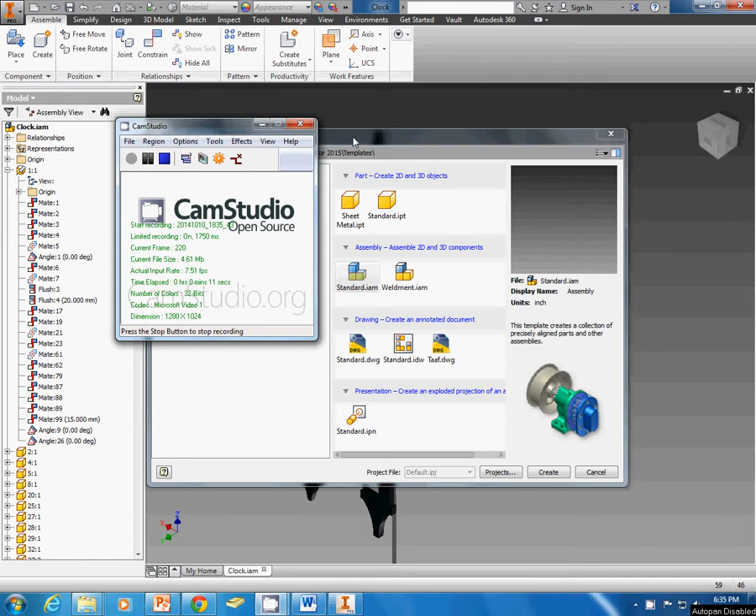I'm going to start out by doing a standard.iam, and I'm going to go ahead and place all my train parts into it. So I need to go ahead and navigate to where my train parts are saved. So right here is the default train parts. Some of these are different than how I demonstrated. This is the train assembled here, but I'm going to go through how to do that.

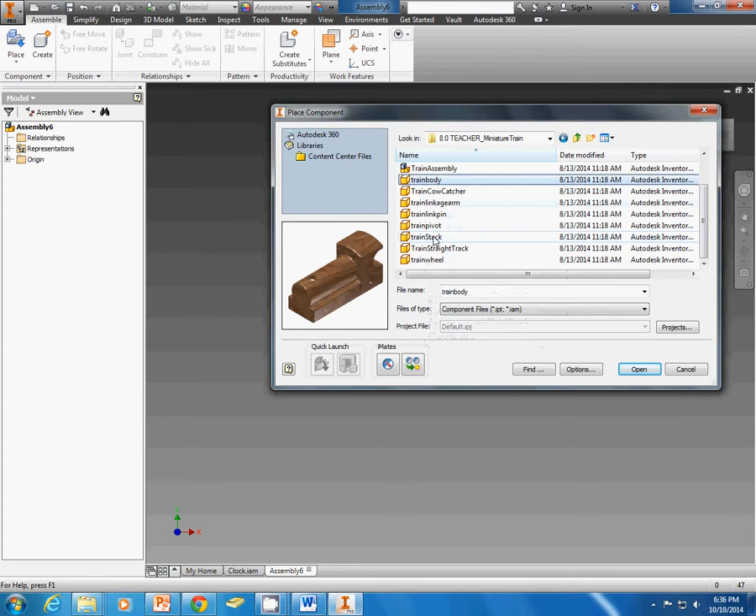So I'm going to place the train body in, and I can actually place multiple parts in at one time if I want to. So for example, I'm also going to only have one train stack, so I go ahead and hold Control and select it. I'm only going to have one cow catcher, so I can select that. And I'm going to have one hitch peg and one hitch magnet.

So I'm going to open up, those are all my one-piece parts, and I'm just going to click to place them in there. Now I like to put all my parts in right away and then deal with them after the fact. If you don't like to do that, you can also place them in when you're ready for them.

So now I'm going to go ahead and get my axle peg, and I also need my wheel and my link pin. Right there. And I'm going to need 4 of each of those. That's why I selected those ones all together. And I'm going to go ahead and place in my linkage arm. And I need 2 of those.

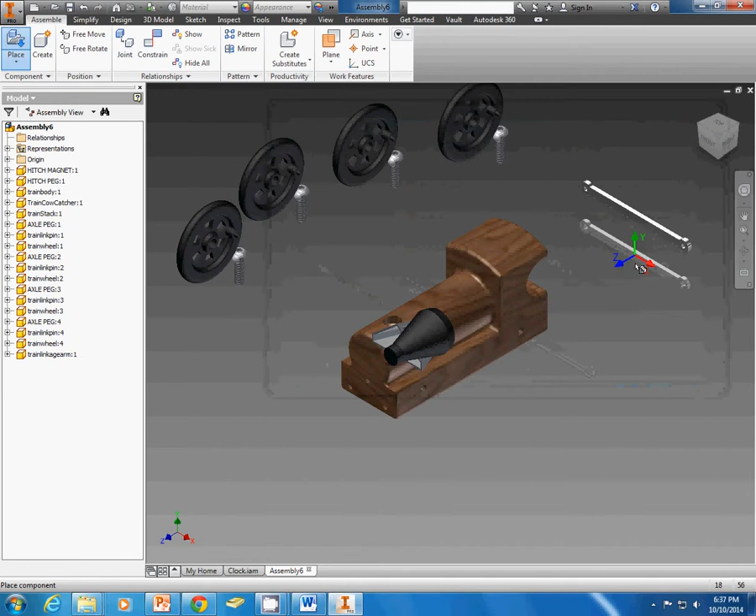So now that I've got everything in there, I'm going to go ahead and kind of drag this stuff off over here. There's probably some more parts sitting right there. Okay, get those, move them out. And I like to ground the train body. This Inventor doesn't ground the first part that comes in, so I ground that first.

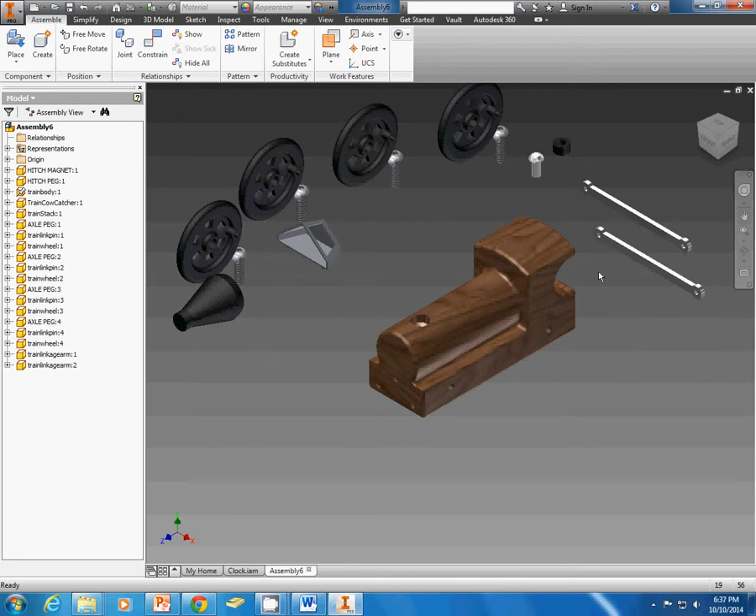Now there's a few things that I want to demonstrate as far as the assembly goes. Probably the easiest part is putting that magnet on the back end. So to do that magnet, I'm just going to use constraints. And using the mate constraint, I can pick a center line and a center line. I do not want to pick the individual circle, otherwise they'll pivot on that center line. So I want to get the center line on both of those.

Then I can go ahead and pick this surface and mate it to the bottom side of this other surface. I'm just using F4 to go ahead and rotate while I'm in the mate constraint. And I want to pick that surface. I could have also hovered over the surface and waited for my drop down to pop up, and I might demonstrate that later on. I'm going to apply that.

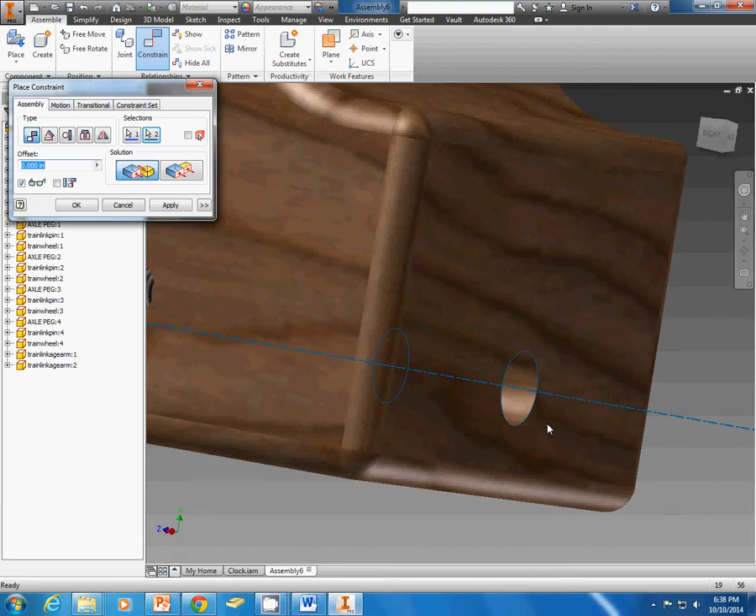Now I can pick that and constrain that center line once again to the center line of the hole. And then I can go ahead and mate the back of this. And to demonstrate, if I want that back surface, I can wait here for it to pop up. Well, it should pop up for me. If it doesn't, I'm just going to rotate around and pick this surface. And that goes ahead and holds that magnet onto the back of the train.

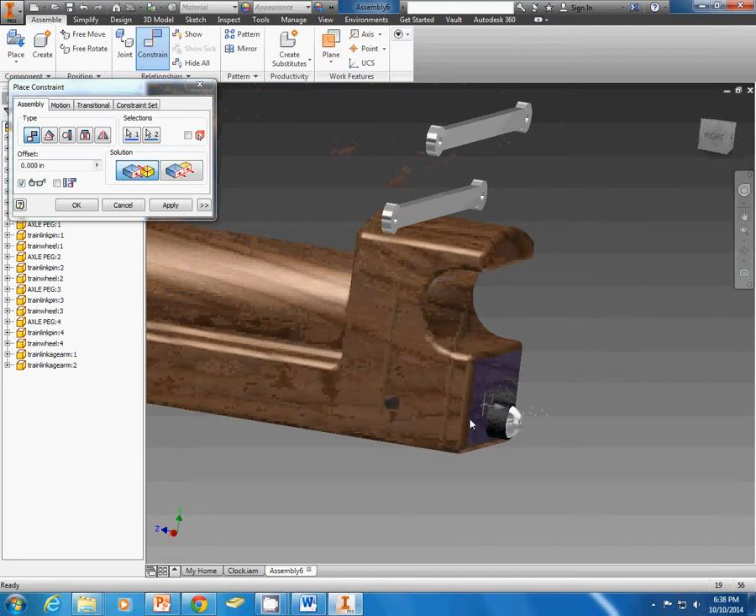Now if I go ahead and move on to the cow catcher, what I'm going to do is I'm going to allow the constraints to get it into place. If I wanted to, I could also use free rotate to move it closer to place. But I'm going to constrain that center line to this hole right here. And you'll notice that it went in there backwards of what I want. So what I'm going to do is I'm going to cancel out.

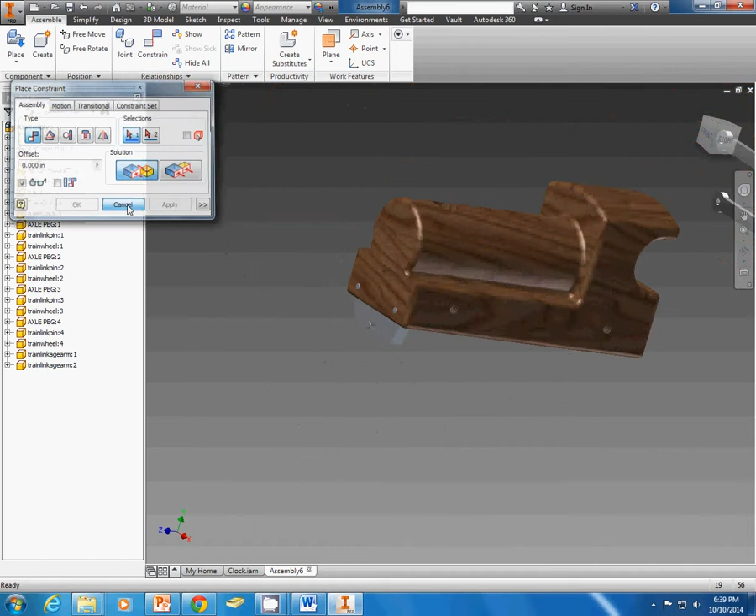I'm going to drag it out here with that constraint. And I'm going to free rotate. Free rotate is going to temporarily relax my constraints enough that I can rotate it around. And then once I've got it close to what I want, if I escape out of free rotate and grab it, it snaps that constraint back on.

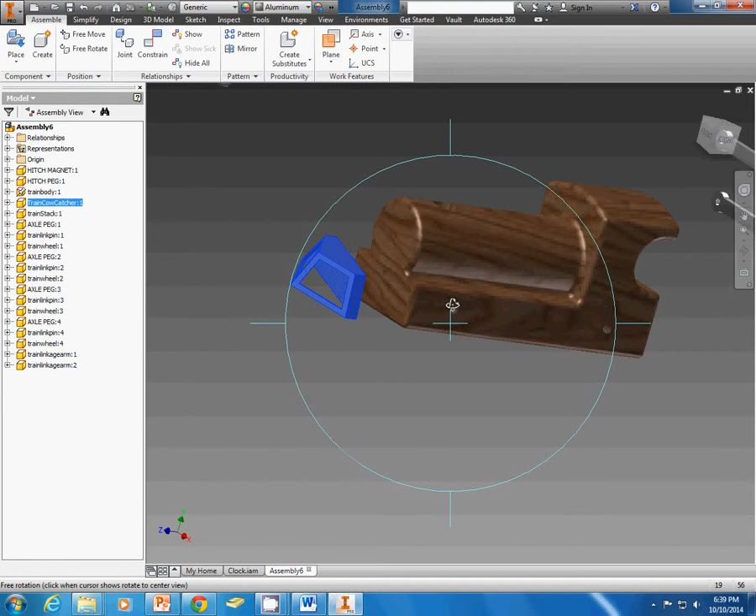Now you'll remember in my other videos, mine does not have this groove in the front. These are the files that came for me, so I went ahead and used those. I'm going to go ahead and constrain this center line to the center line of this hole. And a lot of students will find that if that doesn't snap for them, they've either made the cow catcher wrong or the train body wrong.

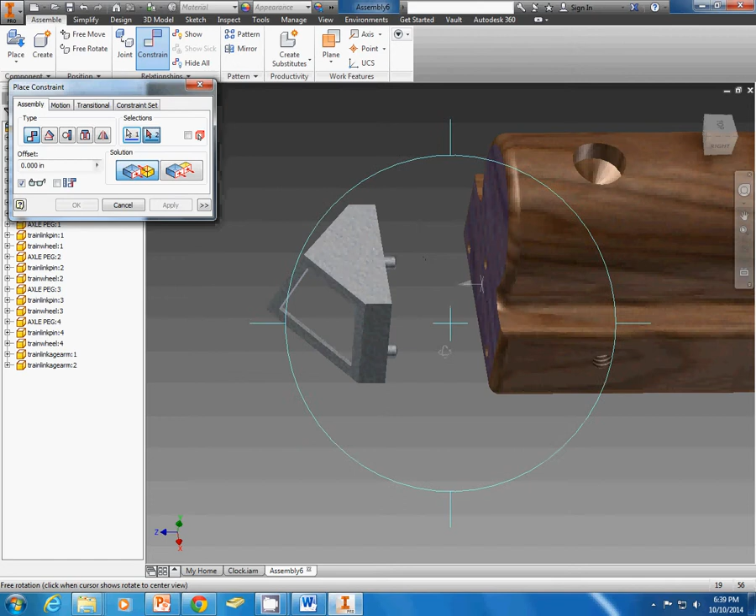That tells them that the center lines don't line up for the 2 separate holes. That means they'd want to go back and measure that distance, make sure they did everything correctly. I'm just mating the front of the train to the back of the cow catcher, and I hit apply.

The stack is another one that takes a little bit of work. I'm going to go ahead and center line to center line. And once again, it's upside down, so I'm going to cancel out of there. I'm going to drag it up out. I could free rotate it, but I'm going to leave it like this. Makes it just as easy for me to constrain that surface.

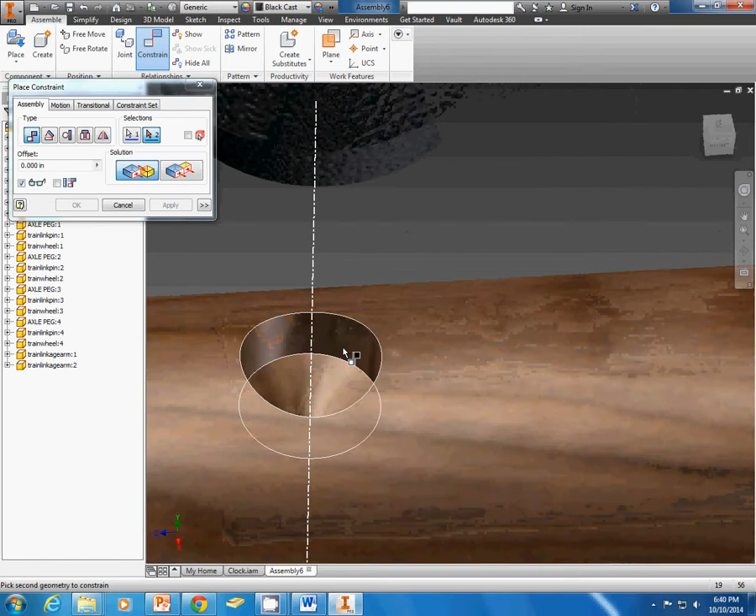Now if we had a flat bottom hole, we'd go to the bottom. Since we don't, we're going to go to that circle. I hit apply, cancel, and now I'm going to have to free rotate it. So I select it, hit free rotate, spin it up there. It's close enough that when I go to grab it now, it's going to snap into place. Now if I wanted to keep it from spinning, I could go ahead and put another constraint on it. I'm not too concerned about that at this point.

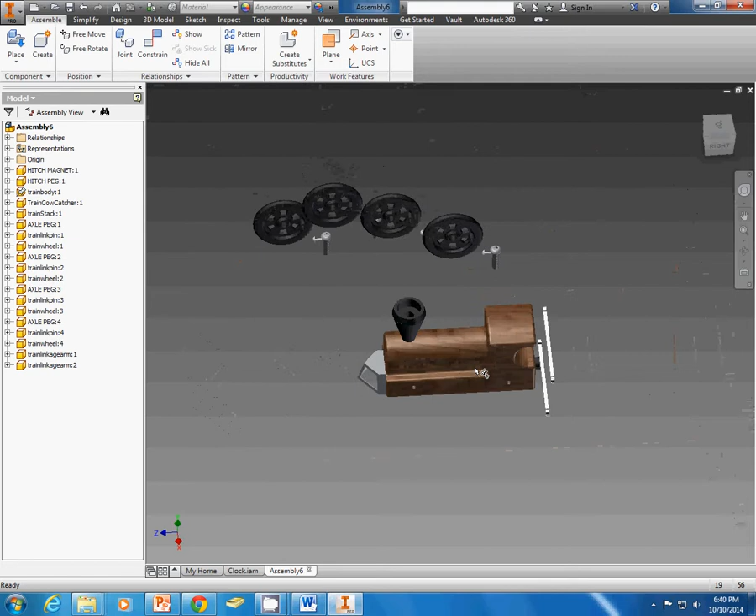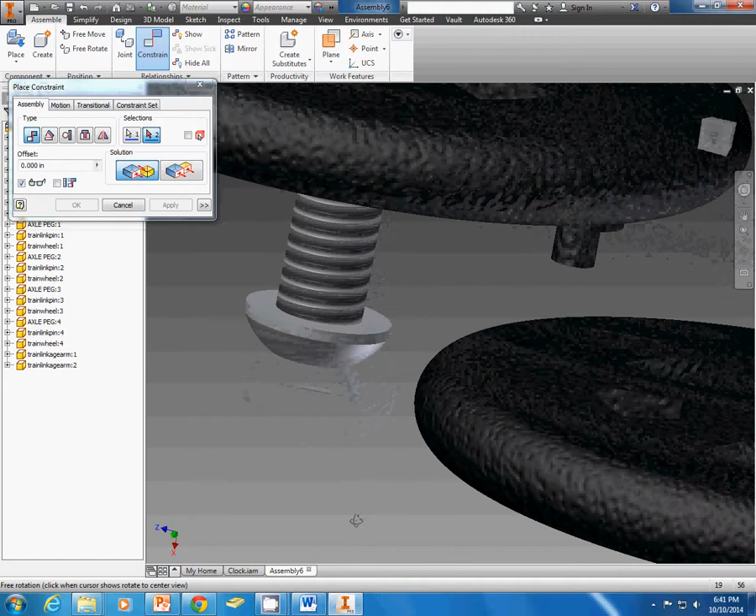Now to go ahead and start assembling the tires together, what I do is I constrain center line to center line, and then I can pick this flat surface right here and mate it to, in this case I'm going to hover and wait and see if it pops up for me. Okay, it doesn't seem to want to do these today, but it should have for me. I picked that back side. That takes care of that.

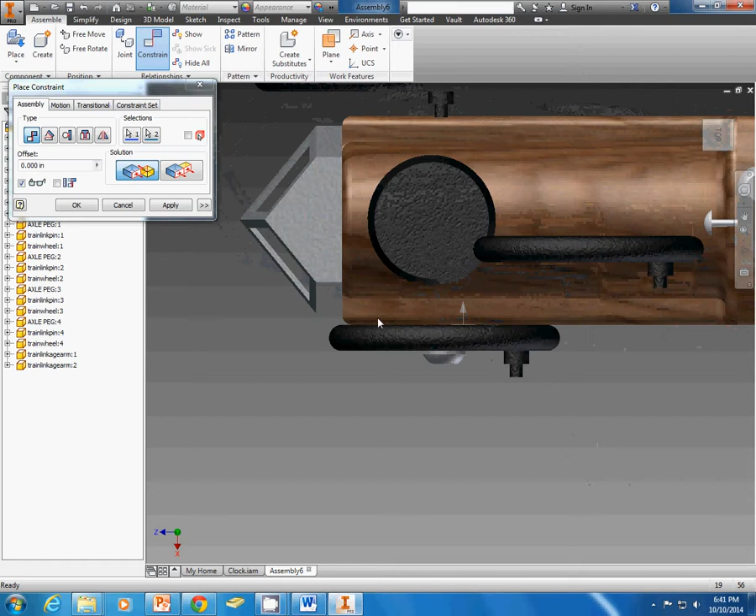I'm going to apply. I'm going to pick center line and go to one of the holes. And then I'm going to pick this face on the train body and this face right here. Now I probably don't want that tight against my train body. Otherwise it's going to rub if this was an actual wooden train. So what I do is before I hit enter, I set my offset at 0.1. And that would also work going down the track.

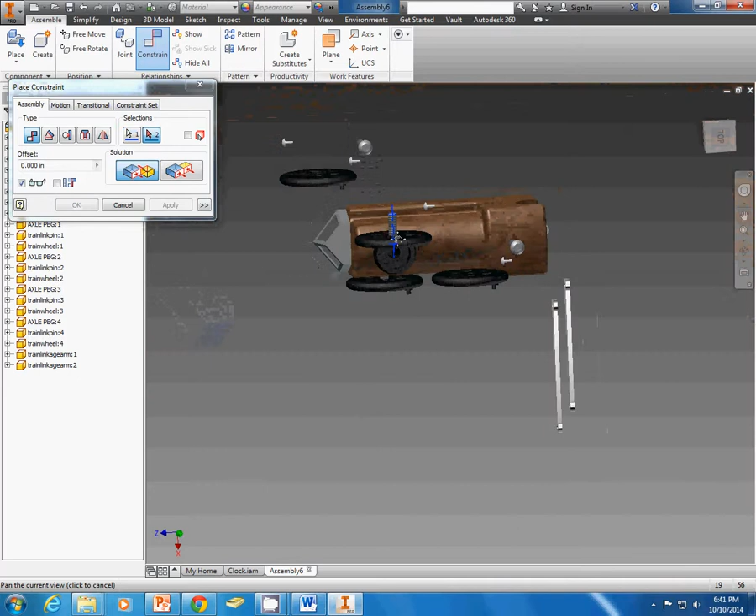So I'm going to go through this a little quicker for a second wheel. I don't think I need to demonstrate every wheel once you see one of them. And once I get the second wheel done, I'm going to show how to do the linkage arm onto it as well. So zip through those. Whoops, I must have hit cancel on it. Let's jump back in there.

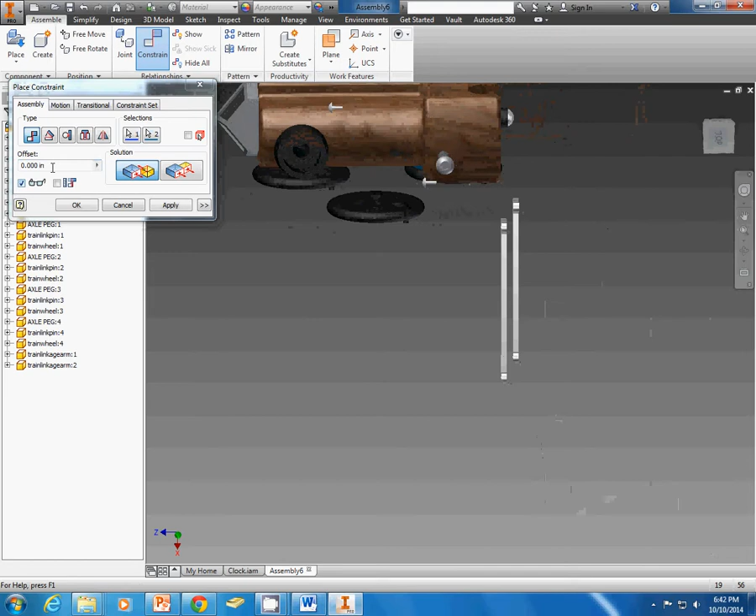And once again, that offset of 0.1. And if you don't set those offsets, you can see how both of these are out. You'll have issues down the road when you go to put your linkage arm on. So you do the same thing on the other side. I'm going to slap a linkage arm on here real quick. So I'm just going to do center line on the linkage arm to center line on that. And I'm going to do the same thing on the other side.

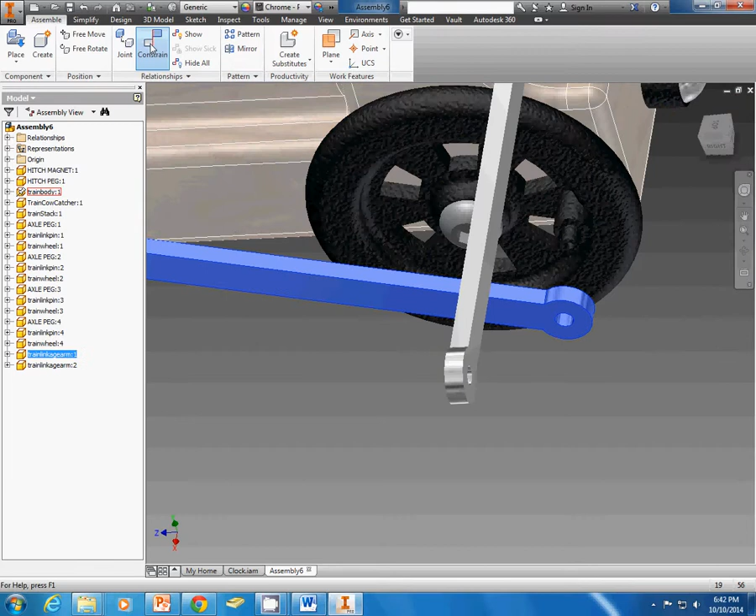I might have to escape out and rotate a little bit so I can easily get my constraints to work. Then I could go ahead and mate the backside of this to the top of the little shelf there. I'm going to make it even easier on myself. I'm just going to flush that face with that face right there. Apply, and then to put the little pegs in, it's about as easy as the axle pegs. So I just pick mate, pick the center line of the hole.

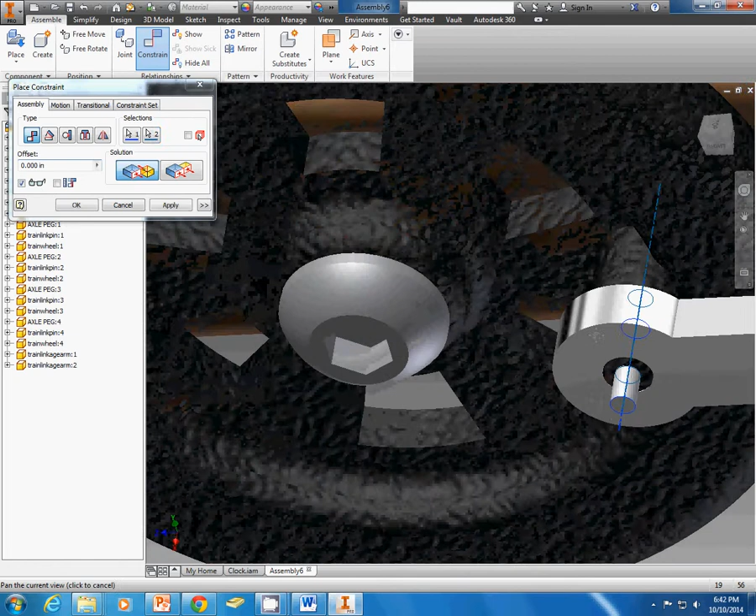Notice it went in backwards, so I canceled out there. And I can go ahead and constrain now that I pulled it out. Do another mate constraint between that and that face. That's right how it should look. I'm going to stick another one on the other end.

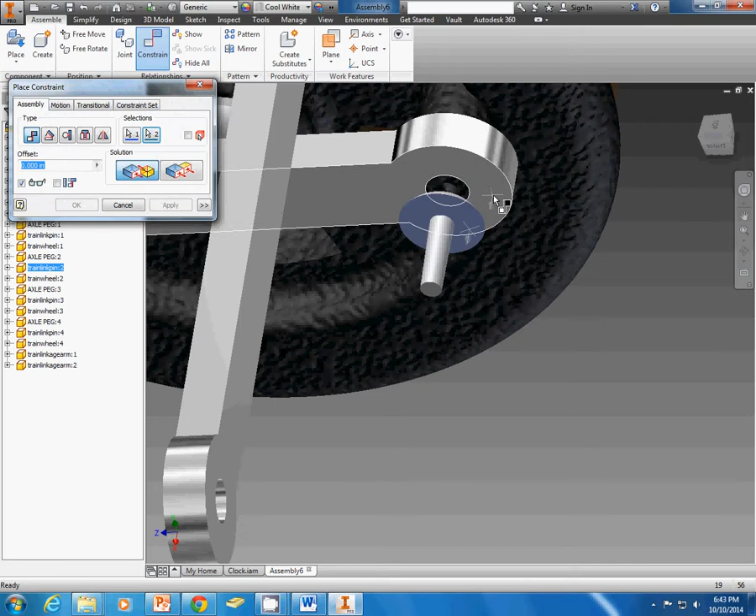And another common mistake that students will have is that once they're done with this, if they go to move their tires, so let's look at this from the right side. I know not everything's in, but if they go to move their tires, this bar won't be level. What that usually means is either their bar is made too long or the tires aren't made quite right. So they'd have to go in and double check all their dimensions. A lot of students will make 3.5 on the inside of the bar, not to centers.

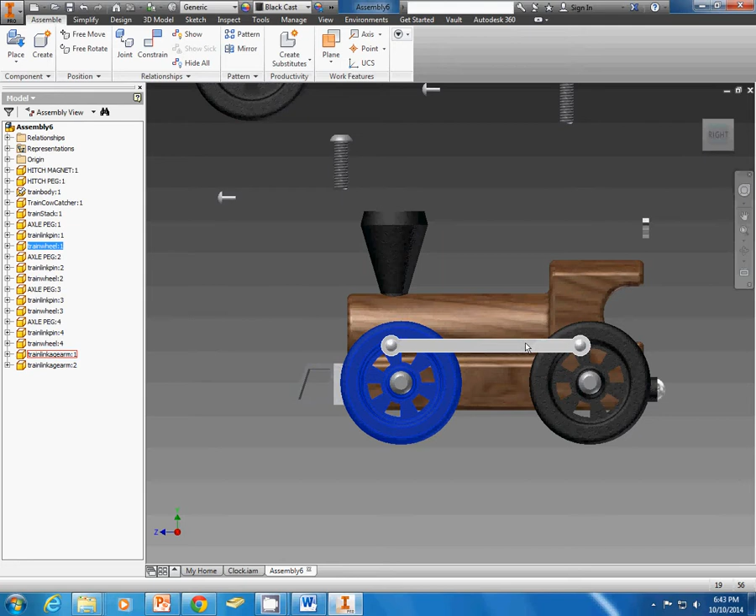So this is the basic procedure to assemble the miniature train together. Remember, there's more than one way to do everything. Some people like insert constraints. I just wanted to show with the basic constraints.